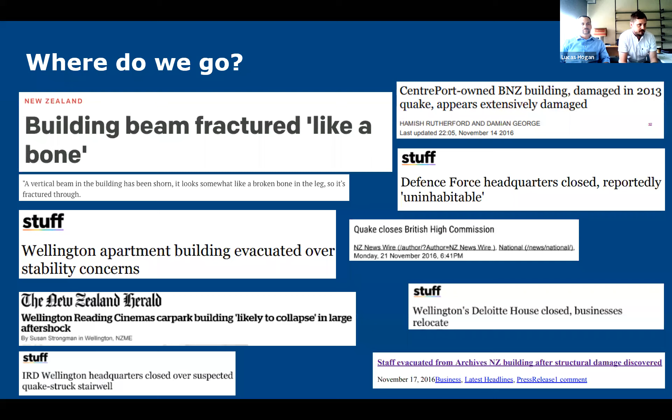Actually, I remember at one point we had heard that there was some damage in a building behind the Amora Hotel. So we ended up wandering around in the parking structure back there, just randomly looking at damage in shear walls and columns. We heard there was actually damage in the Amora Hotel, so we wandered around in there until they politely asked us to leave. So yeah, it was a very chaotic time in Wellington immediately following the Kaikoura earthquake. And so finally we did get into some buildings, and once we did, it was like, oh my gosh, look, damage, what do we do?

But what's really important to note from these pictures is I'm running around taking all these pictures, and I took hundreds of pictures. I filled up almost an entire notebook full of notes. But when I got back to my office, it was like, holy cow, what do I do with all this? How do I put all this together? There's not very good reference between my pictures and my notes. I can't tell where I am in these buildings. It was really a mess.

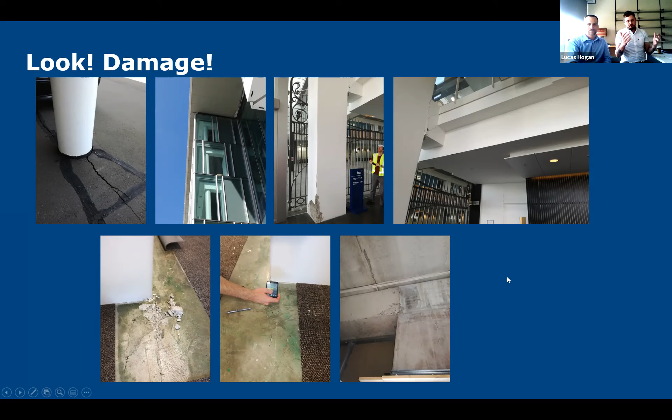And so the challenges are, as I just talked about, once you get to the region where the earthquake has happened, where do you go? How do you identify the buildings you want to look at for reconnaissance? The second is once you get back to your office after you've taken all the pictures and all the notes, you want that picture on the other side of the column. You want that picture on the other side of the beam that you don't have.

Third thing is scale. I'm looking at these pictures and I can't tell how big things are. I haven't held a pencil up. I haven't held a tape measure up. And then there's obviously time. You want to limit your time because you're exhausted and you want to make sure that you're safe. And then later on, you want to focus on archiving data and things like that.

So what can we do to optimize this process? Well, there's two things we can do. One thing is we can use near real-time impact frameworks to prioritize structures we want to look at for recon. And I want to emphasize here, these NRITs can be used for a few different things. One would be to identify structures for rapid structural evaluation to make sure they're safe. What we're talking about here is using them for recon, identifying what buildings we want to perform recon in.

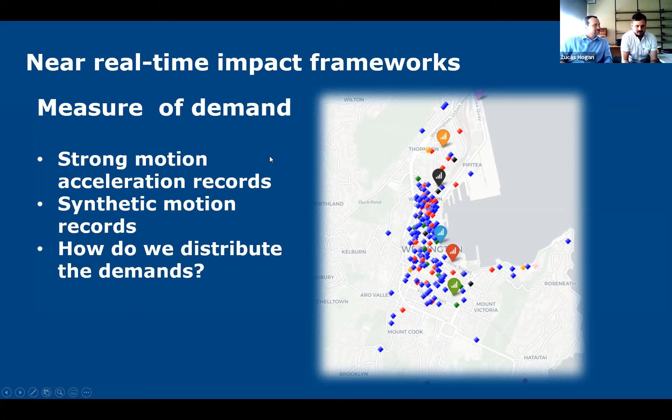We've linked all of our buildings to the strong motion stations based on site period. And what you can see here is we had this nice distributed instrumentation array here in Wellington. What ends up happening when you distribute those demands based on site period is, holy cow, my red and my blue stations are suddenly doing some seriously heavy lifting. And we actually have a proposal in to try to figure out how to optimize this instrument placement based on site conditions. Anyway, cool.

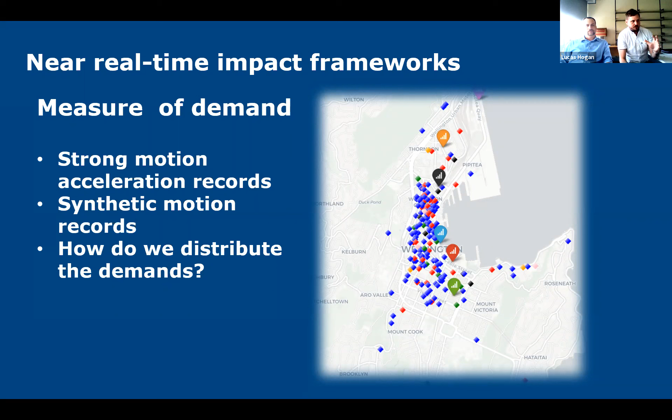So now we've linked the demands to the buildings. What do we need to do next? Well, we need to generate a response prediction model for each building. What that does is it estimates the damage or response to the building based on the intensity measures of the ground motion. And there's a range of ways to do this.

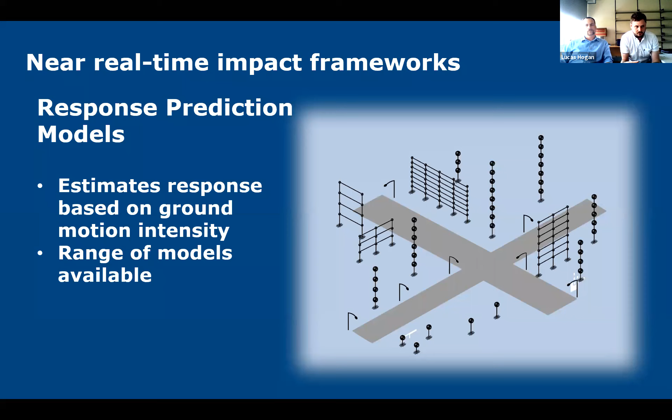All of the NRITs around the world kind of do it a little bit differently. Some will use the capacity spectrum method. Some will develop finite element models for all the buildings. But what it all comes down to is you want to develop a model capable of estimating the response of your structure subjected to that ground motion that we've now linked to that intensity measure gathering tool, e.g. the strong motion station.

There's a few ways you can do it, and I'm going to introduce this SDOF method just because this is what we've developed in Wellington. You can essentially develop an SDOF analysis where all you do is look at the design spectral acceleration at the first period of the structure and compare it to the measured spectral acceleration at the first period of the structure. Using analysis like this is fairly efficient. You're only looking at a couple of numbers for each building. You can run the analysis very quickly, and you don't need all that much information about the buildings.

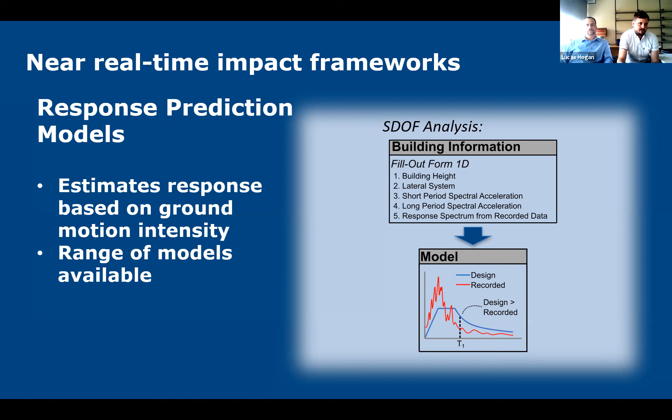The second approach that I have shown here is an MDOF analysis. This is a much more complex approach where you essentially develop finite element models for every single building in your region of interest. But this can be very time consuming. You need a lot of data to build the models, so building the models can take some time. And then if there's an event, it takes some time to run the models.

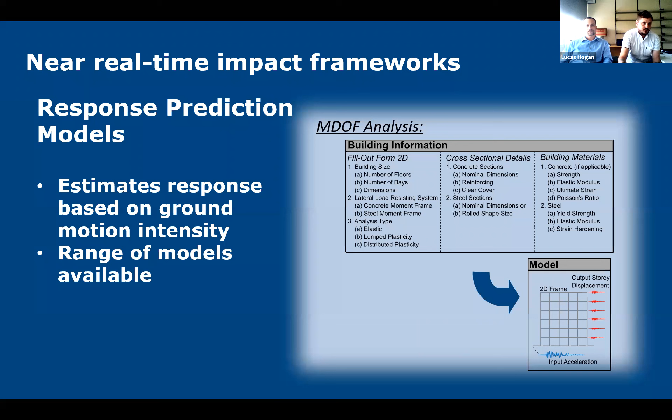And just to pitch a project that I'm working on right now through EQC, we're developing a machine learning driven framework for Wellington, which will hopefully give us a very accurate response prediction estimate of all the buildings in the Wellington region almost instantaneously following events. But that's not really the focus of this talk, so I'm not going to talk too much about it here. But I've recently made some pretty interesting progress on this project. So there's more to come, so stay tuned. So we're not quite here yet.

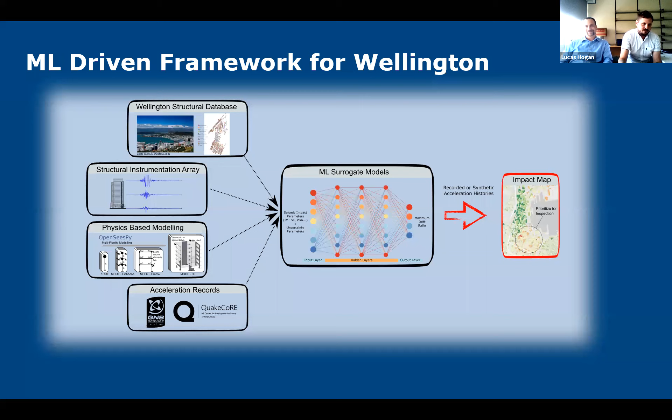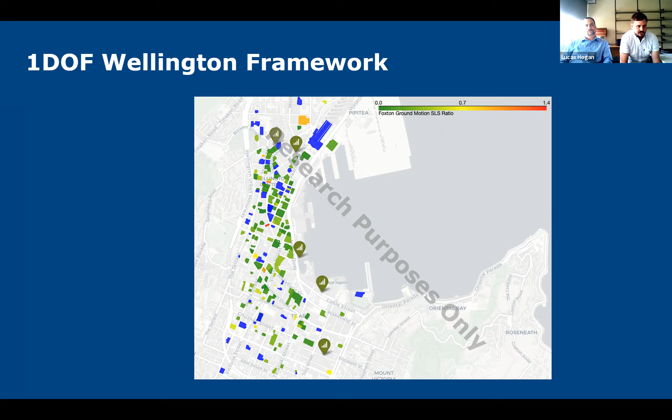But what we have developed, like I said, is a 1DOF Wellington framework. We've linked all the buildings in Wellington to the strong motion stations based on the site period. And then we're able to compare the design accelerations based on the year of construction to the measured accelerations from the strong motion stations. What I have shown here is an earthquake earlier this year in Foxton. This is a serviceability limit state ratio for the buildings in the database.

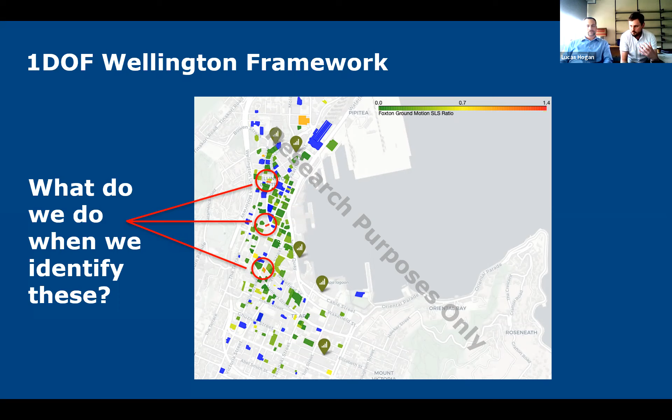So the next question is, let's say we've identified these buildings here as buildings of interest for reconnaissance. They're getting pretty close to their serviceability limit state. What do we do when we identify these buildings that we want to perform more detailed recon on? And with that, I'll pass it off to Lucas.

And so if we're going to go through these, we've got lots of options. Like I said, this is going to look at a state of the art, but really state of the art to us. There's a number of industries outside earthquake engineering who've been using these technologies for a long time. So there's lots of cool things out there, and some of this might be helpful. So you've got drones. Boston Dynamics is coming up with the really slick Spot robots, but some of them might not be so helpful. They might be too complicated.

There might be a lot of issues around what we are and aren't allowed to use in a given area, given privacy, given access, all of those things. So what I want to walk through is a little bit of how we've approached this on this case study building.

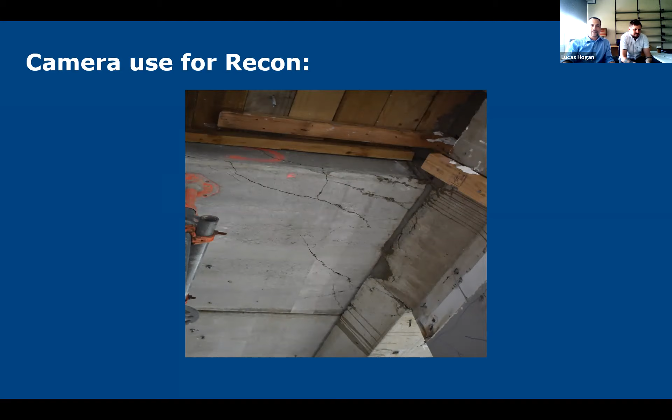The first thing we want to look at is what we've all done previously, where, as Max mentioned with Kaikoura, you show up, there's a building, you've got a camera, what do you do? The tendency is to go, hey, look, there's a crack, cool, that's really neat damage. But at the end of the day, you'll go through more pictures, more pictures, more pictures. What do you do? How do you sort them out? How do you know where they're from?

Some really straightforward things, which don't need any big complicated technologies, are just knowing how to organize yourself and your data. The first thing you're going to do is take a visual record of where you are within the structure, or what the structure is. So if the building has a name on it, that's great. If it doesn't have a name, find your nearest intersection.

Once you've done that, you need to take what are called establishing shots. We've all seen these, if you've seen movies or TV, it's anytime before you go into a scene, there's a shot of the overall area. In Seinfeld, every time they go from the apartment to the diner, there's always footage of the exterior of the diner.

Once you're there, take your photos, and you can do this at a different hierarchy. What I've got here is an establishing shot of this column, and then our orientation is, because this building was going to get knocked down, we could just write all over the walls. So we wrote what column it is relative to the grid lines of the building.

If you have drawings, fantastic. If you don't, and you're not allowed to write on something, well, bring a whiteboard or bring a piece of paper, bring something, because you want to link that with your photos. You're more likely to keep all your photos together, and you're less likely to keep your notes with those.

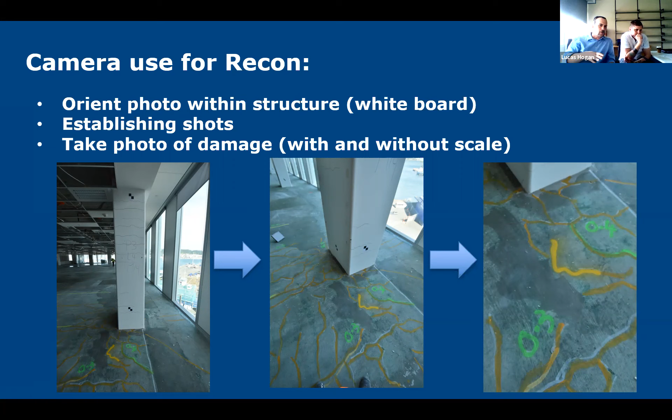Once you go in, take your picture of the area of interest and do it with scale. You can see these numbers here are crack widths, but you could do that with a ruler, a pencil, a phone, all these things which have relative scale. These principles, which you use with just a normal camera, follow the same process with these new technologies.

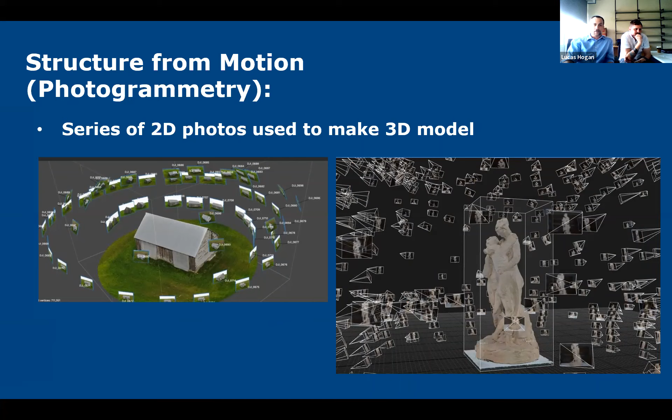So the first one we want to look at is structure from motion, or photogrammetry. Essentially what this is doing is you're taking a bunch of 2D images running around your thing of interest, and they stitch together a 3D model.

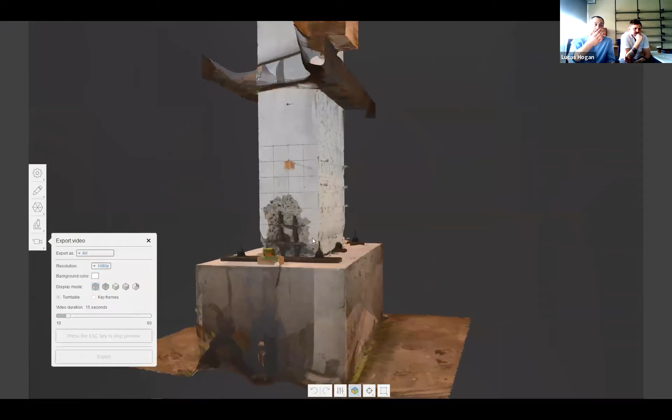I've got just a quick little video. This was a column that was in our lab, I see Tayo's on the call so he'll recognize this column. Before we went down to the building, we said, well, let's just see, since we've never played with this technology before, let's see what we can see and how useful it is. And it is relatively, here's just a still from that model, pretty good resolution.

So when we go through, for prep, what we do, as I said, you want to have a nice clear area because you need to try to walk around the structure and keep more or less the same distance and the same image quality, exposure, and all of that as you're moving around. Because what these algorithms are doing is they're just comparing pixels together, and if they have a pixel which is similar, they go, hey, that's the same spot, and they'll stitch your photo together appropriately. If you've got wildly different lighting, that can be a challenge.

The other thing that helps is, again, we could draw all over the floor, so these cracks are this nice random array of pixels as far as the camera and the algorithm are concerned.

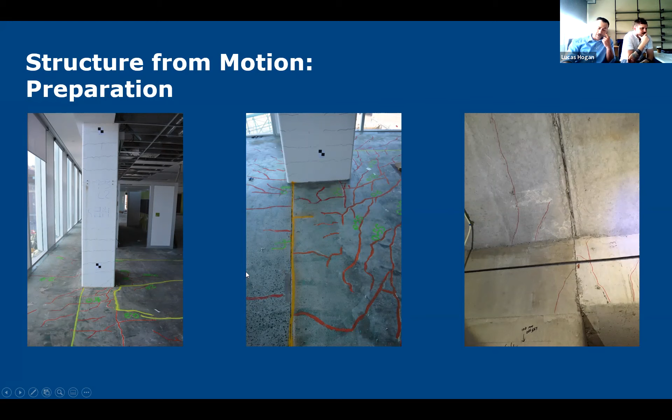So there's lots of places for it to stitch together. And you can see we've also glued on these targets, and from those targets you can pull scale, because the structure-from-motion stuff doesn't know how big a thing is. It's like a vector image for Photoshop or a PDF—it just knows relative geometry.

One of the challenges with these columns is that we've got this small bit of facade with a small distance to it—that's about as far away as we could get, so we had to use a really wide angle lens to get everything in. Also, there's the exterior here, and since there's no power in this building, it's much darker on this side, so we had to do some supplementary lighting.

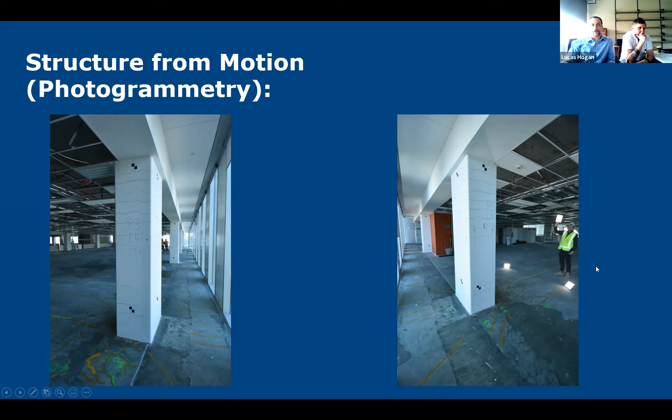You can see Max playing tripod there. Then what you do is just literally walk around and take a whole heap of photos, and you end up with something like this—each of these triangles is a location where an image was taken. To get a decent model pieced together, it's about 70 images per column, so you can see everywhere Max stood and took an image at different angles so you could get this whole thing stitched together.

Showing you here on the right, some of the challenges with this—it's not necessarily turnkey. You have to make sure your exposures are right, your overlap is right, and that you're not zooming in and out on the image, or else you'll end up with these big holes and bubbles coming up on your model. That's just using a DSLR, but the same principle applies for really any camera.

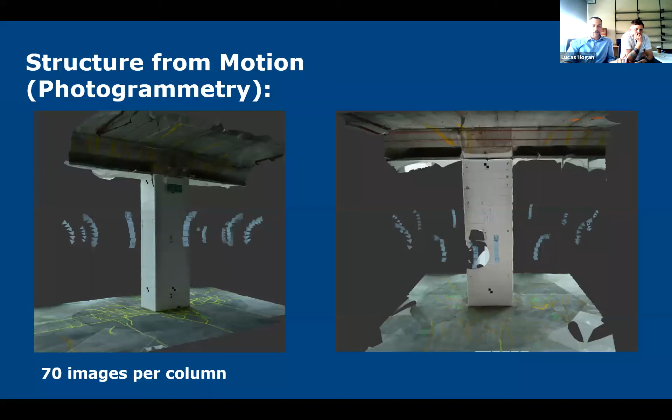We wanted to, while we had access to this building, try a few different methods using the same technique. So the first thing we wanted to do is drones. Drones are great—they're cheap, they're easy to get. They don't like flying indoors though.

Your commercial drone relies really heavily upon GPS in order to stabilize, so if you're inside, you're not going to get that. You have to compensate by having a decent drone pilot. Jeff had flown this drone for about 4 hours over the last month before this. None of us there were experienced drone pilots, but we did learn quickly—it was a lot of challenge.

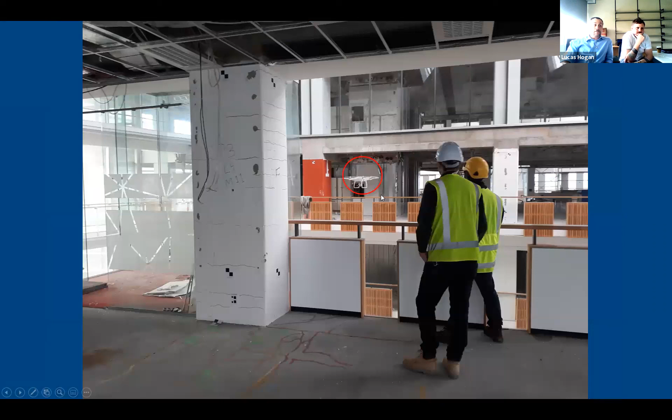The big reason we used it was we had these big atriums. We wanted to see what was going to happen over here—well, we can't stand over here unless we're going to Wile E. Coyote it. So that's where there was some use.

I will say, flying in here we tried to go in between the columns, and you get lots of prop wash, really challenging for the little drone to stabilize itself. Again, where it's super useful is exterior shots, places where you're going to have difficult access. So parts of this are using the tool as it's appropriate.

We were like, well, we're really interested in the floors of this building—let's see what we can do. The roof is off, so now we've got a GPS signal. Can we do the same thing but basically pretend we're indoors and see if we can do these sort of preset flight paths and everything else that the brochure said we could do.

Things to note: you are an aircraft, so you need to have Airshare. Max will tell you there's lots of challenges making sure the drone knows what the ground is when it's level—40 meters from the ground is different than 40 meters from the top of a building. And the big one, you'll find this out pretty quickly if you're anywhere near the water: seagulls hate drones, and they will come and start dive bombing them. So that was that one.

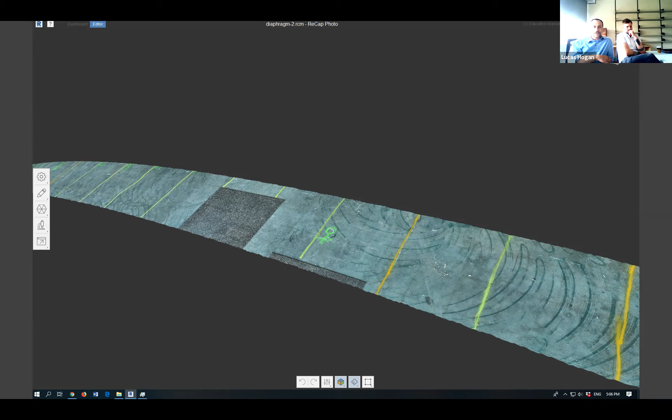One final thing to talk about with structure from motion, which is really important, sort of the pro tip, is make sure you take your images in RAW format instead of just a straight JPEG. That means you can go back, edit, adjust, just like you were doing while taking the pictures in the camera, but you can do that post-process, so it's a bit more forgiving. If you just take a straight JPEG, you're stuck with what you're stuck with.

Essentially all laser scanning is doing is sending out a line of laser beams, and then it's got a sensor coming back and determining basically travel time. Most of them have a 360 by 300 degree camera, so you can't see the 60 degrees where your tripod is. So you can get this full sort of 360 HDRI image.

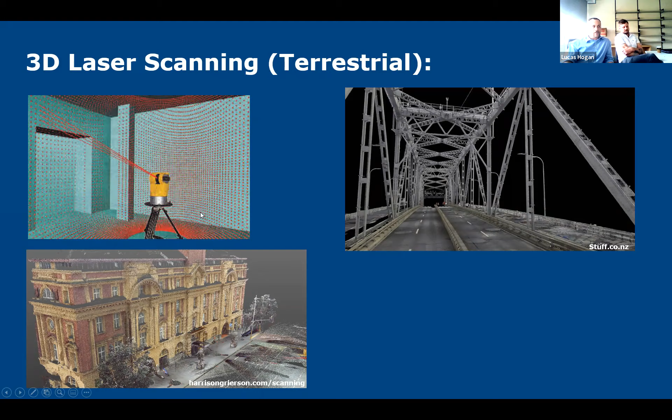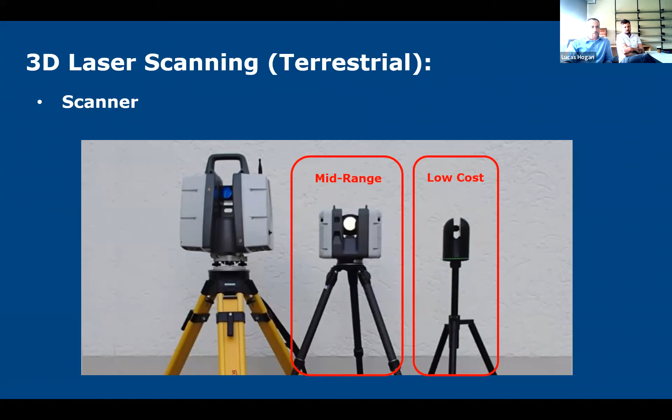So what did we do? We wanted to try, well, there's all these different scanners out there, some cheap and some really expensive. So we tried 3 of the low cost budget ones to see, well, are those suitable? There's only one button on them, so they're pretty easy to use, versus a mid-range one, which is a little bit more expensive per day.

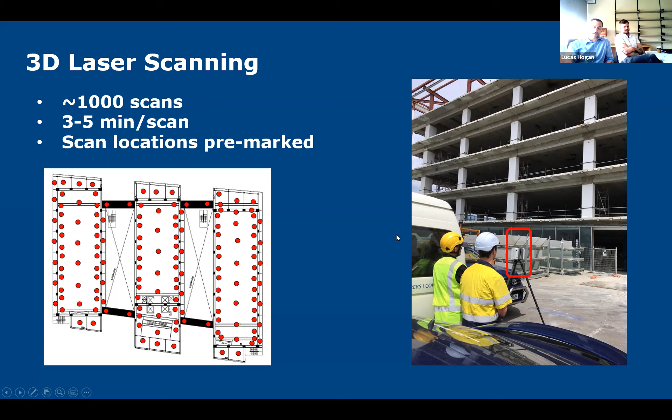So we went around and took a whole heap of scans, about 1,000 of them. A lot of scan projects are about 10 to 20, so this was a tough one to learn on. You can see us in there scanning, basically waiting for it, and it's between 3 to 5 minutes to do a full scan. So you can see all of that time does add up.

Just a little bit of a video of our output here. The real advantage of this is we do have something which is dimensionally accurate. Like any of you familiar with surveying, you do want control points linked back to a datum to make sure you lock in all of your geometry. And those little tiny squares we had were very much ways we could help tie multiple scans together.

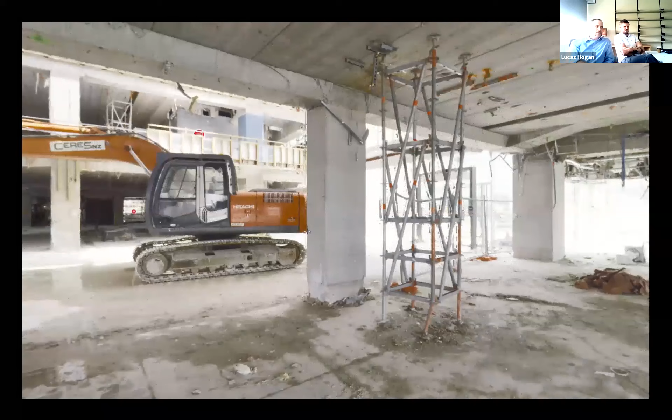So this is just really going around looking at each of those 360-degree images. The nice thing about this, it's like time travel, so we're pretty much just going back. We have a look and like, well, where was that damage? What did we see? We can quite easily go in between floors to see if things propagate through.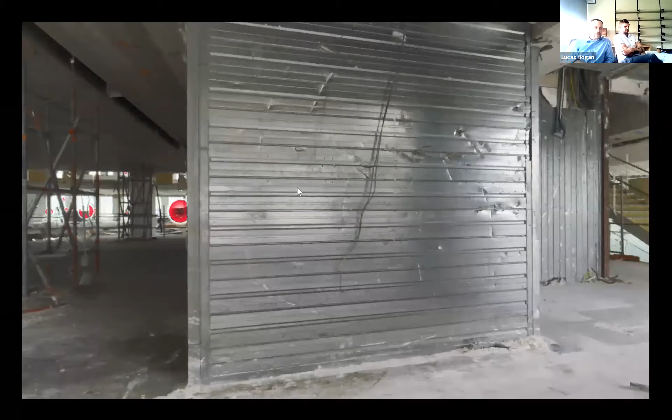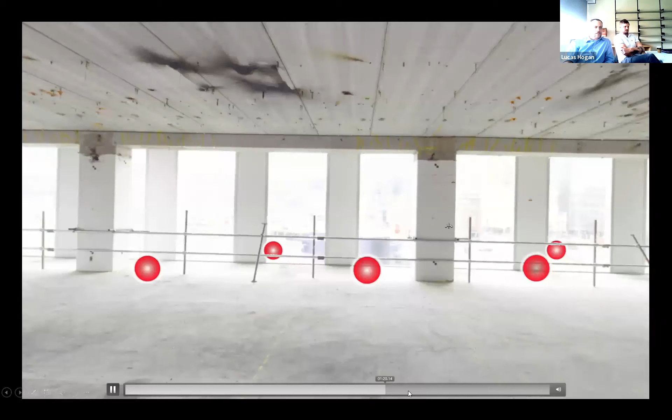Every time we go to one of these different circles, which is a scan location, you'll see it gets pixelated, and that's really the point cloud map coming through. Just for the sake of time, we'll kick through a little bit faster. But you can see we saw damage which we hadn't seen or tested before in other buildings, and this allowed us, by us I mean Mo, to go back through and see where this damage occurs.

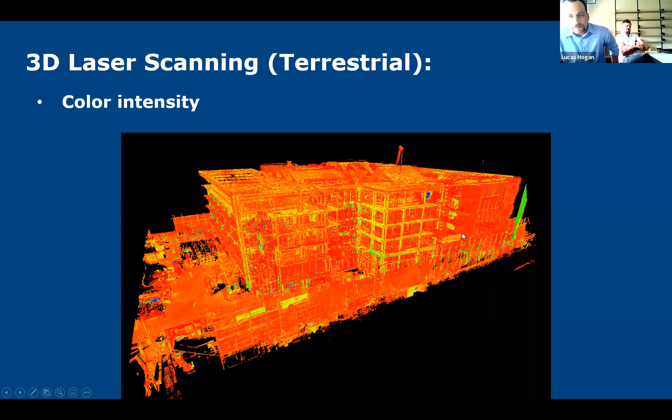How often does it occur? Do we see patterns? And then, you know, we'll just flick through real quickly some of the outputs.

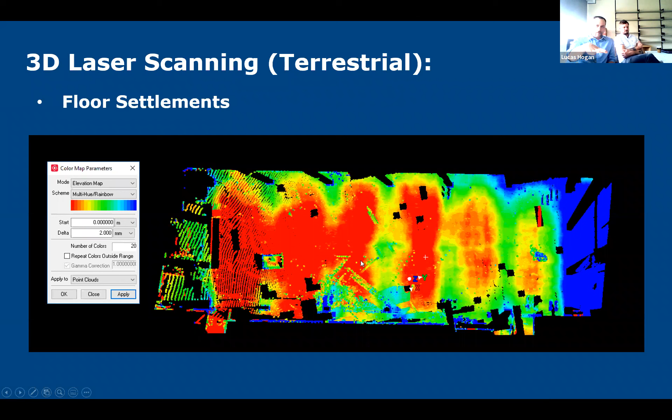So not only do you get the images and the point cloud, you can also pull out the color intensity of the laser jumping back at you, which is useful for things like cracks. And you can do stuff like look at what your floor settlement is. Because we're structural engineers and do work with concrete, oh boy, do we love cracks.

So here's a scan of the floor. And you can see the hole here is where there's a column, so it's not going to be able to scan in the column. And you can see these sort of spider web things are the cracks. Some of those are getting picked up because there's a big color difference from where we've marked them, and some are, you know, great big cracks, and so you get a different reflection.

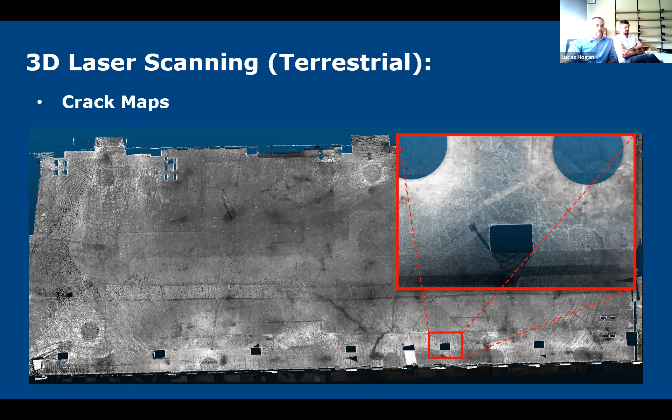So we've been working on crack detection. As you can see, it seems to not be able to detect the biggest cracks in there. So this is definitely a work in progress. So the promise is there, but it's a challenge.

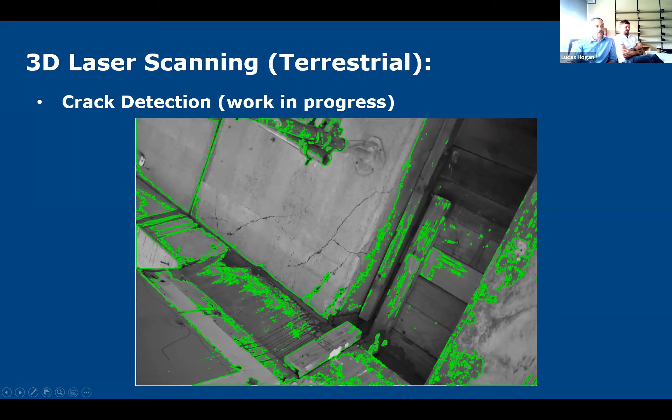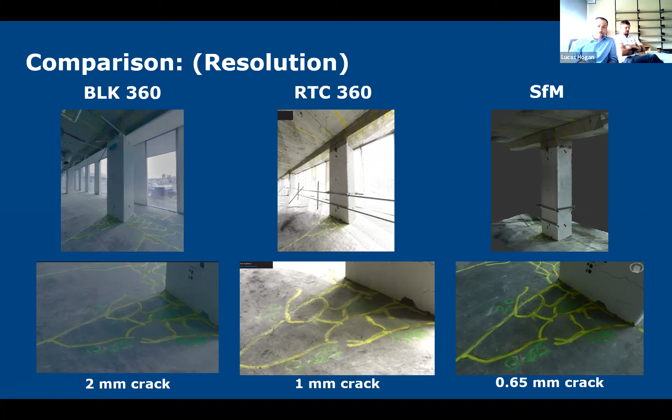So the final little bit here, the last few slides are just how do these things stack up together for a number of bits. So in terms of resolution, the structure from motion is by far the best we can get. So we get down to quite small cracks. That makes sense. It's this really high resolution camera, lots of images, while these 360 cameras coming off of the scanners are going to be sort of, you know, your 13, 15 megapixel and then stitched together. But even there, they can get about 1 millimeter, which to be honest, for big damage, that's about all we're going to look at and all we really care about.

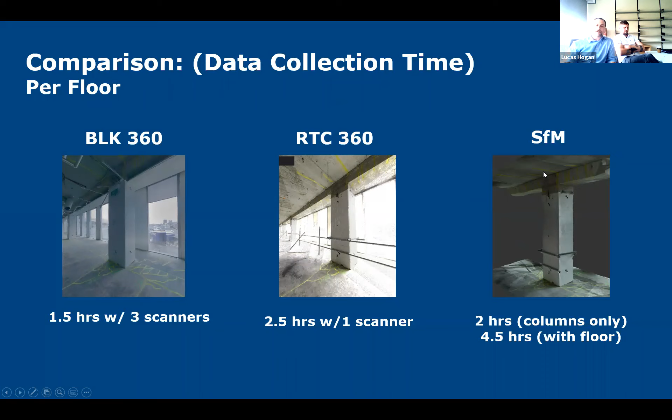In terms of how long things took to use, because this is really important if you're going to go out and do this, is there's going to be time. So the cheap scanners took about 1.5 hours to do one floor with 3 scanners, and you had 2 people moving them around. For the mid-range scanner, you had about 2.5 hours. This one was nice because it could keep track of where it was relative to the other scans, which helped with post-processing. And the structure from motion by far was the one that took the longest time, just because you're taking so many pictures manually and it's a slow process.

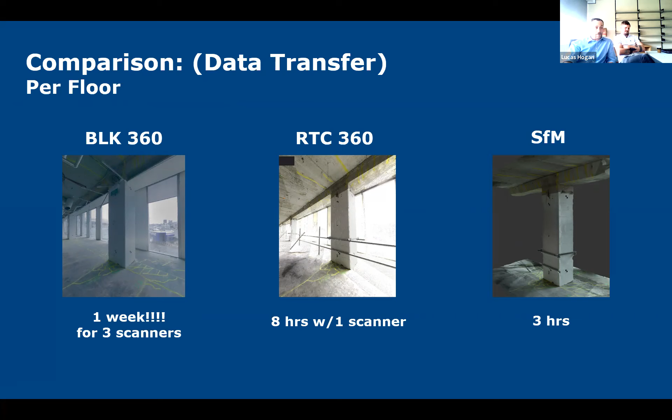Other things which were sort of eye-opening was, you know, you collect all this data on the machine, you got to get rid of it. So the structure from motion, we're all fairly familiar with this. We've all taken images off of an SD card, about 3 hours, just because we had gigabytes and gigabytes of images. The mid-range scanner was similar given the terabytes we're pulling off. That was about 8 hours to pull off all the scans. But the cheapo ones, because it was a Wi-Fi transfer only, it was basically real time, as you took the scan. So it took a week to get all 3 of them off. That was a right nightmare.

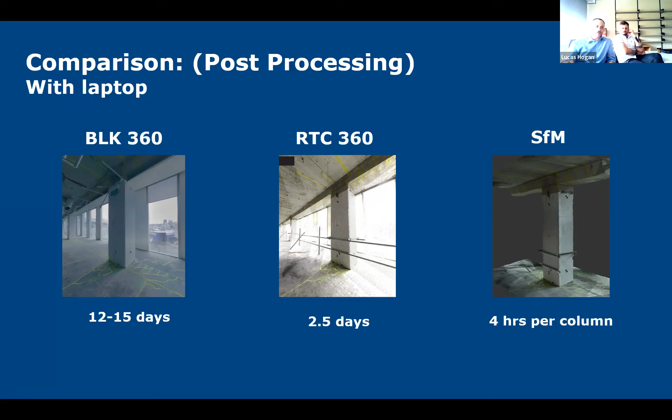So I guess just sort of concluding remarks, we're working on new ways to do these frameworks. The existing tech we have is actually really good. And the big part of this is trying to make sure that you are aware, you organize before you go out. These new techniques have a lot of promise, but there's a really steep learning curve. So if you're planning on using them to go out and do recon work, make sure that you've spent some time with them before you head out.